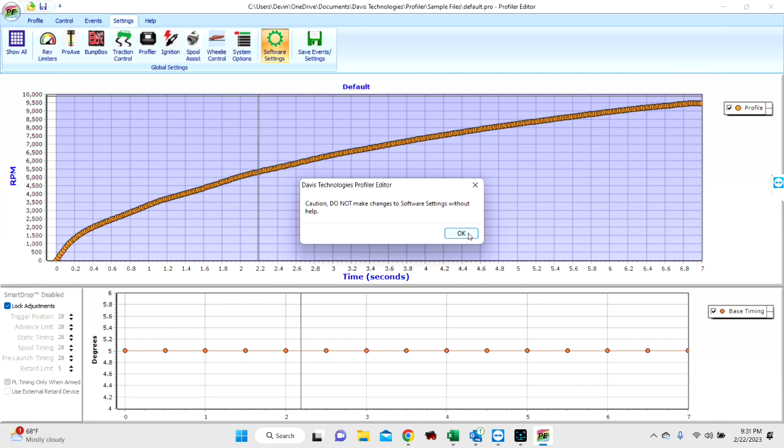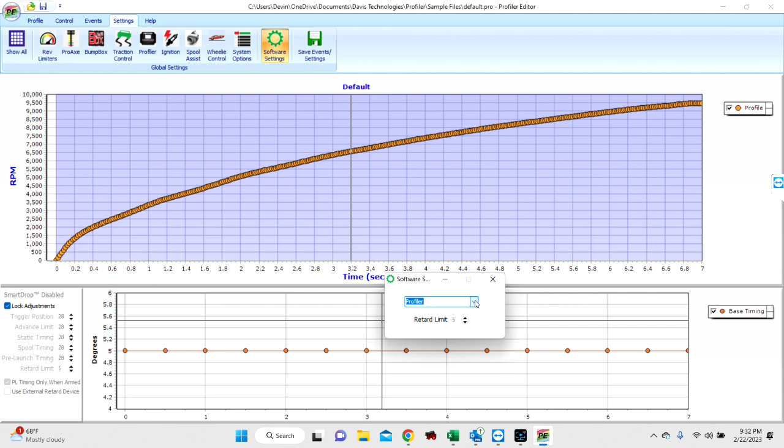You can do a Profiler, which gives you full use of all this stuff over here. But there's the pre-canned setup, so to speak, for Holley and Fuel Tech and our analog digital controller, the DIC. You can come in here and drop down, you've got a PFEFI or TC3 on Holley. That locks it in. Holley is pre-scaled at 0 to 25 degrees of retard. So that sets this, which is the most important part, so that when we do things over here in the timing, 3 degrees on Profiler is 3 degrees on Holley. For example, if you go to...

So is this something that everybody should hook up with a TC3? It's good to do it. The TC3 should come out of the box with a basic setup in it when it's licensed for Holley or licensed for Fuel Tech, but I can't say that works 100%. So just do it, right? Just everybody do it. Yes, and even though your TC3 series doesn't have a profile, like uncheck that, you can still use it to download the data and to do your basic system options and that stuff.

Back to the timing configuration, Holley is preset for 0 to minus 25 degrees. Fuel Tech is 0 to 35 degrees. So if you had it set here, but it's going to a Holley, 3 degrees ain't going to be 3 degrees. It's going to be offset that percentage, right? So you want to make sure this is right. And it's just a little easier to understand as a whole retard platform. Whereas when we do a Profiler, it's in timing degrees. Actual, what I call timing light degrees, which you see on the balancer.

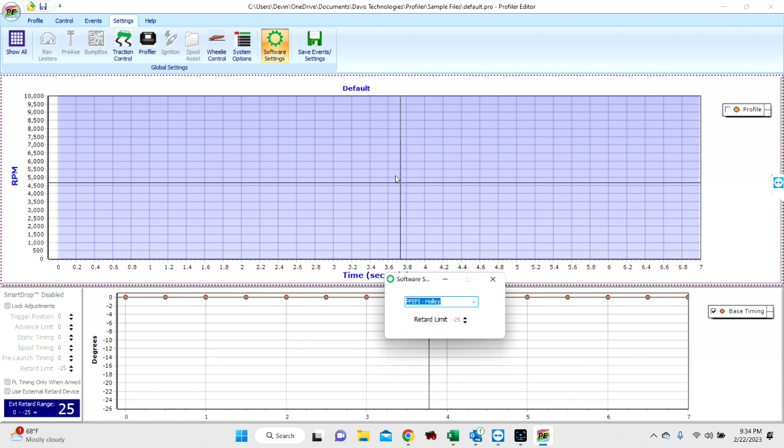They're used to it anyway. So we're telling the Holley, hey, we're in traction trouble, take out 10 degrees. So whatever the Holley's already doing, we're going to take out 10 more degrees unless there's some limit that it runs into, right? So you click this, it automatically sets this, and it turns off features that a Profiler EFI module doesn't have, which is the most likely thing, a PFEFI on a Holley. You can put a Profiler on a Holley and have all your events back, but it's not the most common setup. So those guys are going to call me anyway.

Okay, so we've got our PFEFI. We've got it set up for Holley. Our timing is locked in. We can't change any of this. Our external retarder, which is the Holley ECU, is set for 0 to minus 25. So then we get into the system options, basically how the car's wired, what equipment's on the car.

Okay. So are you going to hook up an arming switch? Hopefully so. You don't have to. You can set the unit for always armed, but you stand a very good chance of losing data because you press the trans brake button to turn the car around, get back under the tent, taking the steering wheel off at the end of the run. The way Profiler works, when it sees a trans brake release, it overwrites the last data. So if you happen to hit the button with the car powered up as you're pounding on the steering wheel with your new world record pass, you just lost the data. So I like an arming switch.

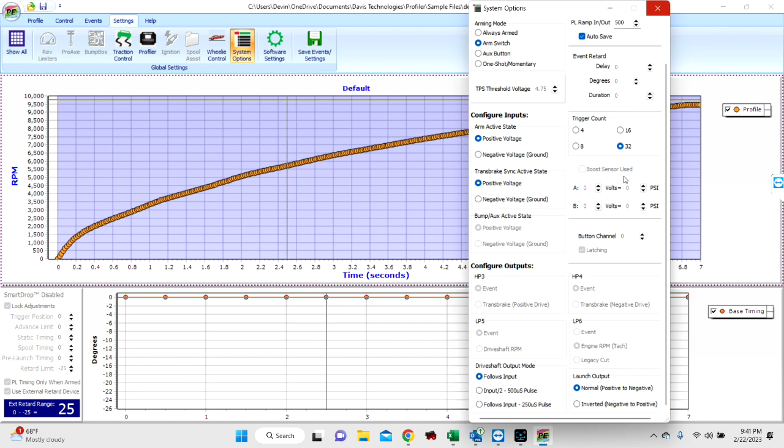All right. So you've preached this to me, and I preach this to everybody when I do videos. We just made a whole bunch of changes, so what should we do right now? I was just going to say it before you so rudely interrupted. Save and save often. You have a quick save up here. Right now, we are under the sample default thing. I don't think it will let me save it. See, it wants me to give it a real name.

So what I like to do, this is my habit. Let's pretend you're one person, one car, new folder. We'll get Devin straightened out here. 2023, okay? And then I like to go into that folder and create a track. In this case, the track's going to be shop.

It could be Sick Week, whatever, which, by the way, I think Devin just won, dominated, with a brand new car that his wife, I think girlfriend, built most of. So kudos to her. The wiring seemed to hold up for the whole run, and it was a good deal.

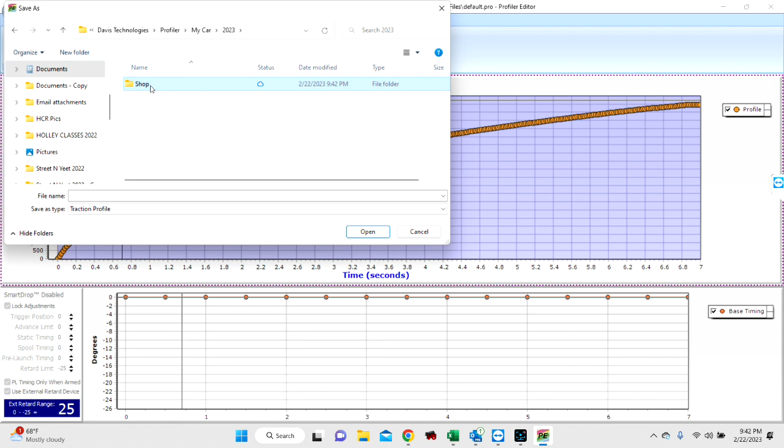All right. So we've got shop, and under that shop, we're going to save a run called shop T1. Now here, you can name these as long as you want, whatever makes sense to you. Hey, Sick Week with new converter, blah, blah, blah. You can make these as long as Windows will let you. Save that. This blue default, that's what's called the chart title.

I use it as a memory jogger. So I click that, it brings up the dialog. You want to keep these short, definitely under 32 characters, but the shorter the better, because when you upload, this name gets uploaded. By the way, you don't have to put the T1. We'll cover that in a second. You hit OK. When you upload, this name will be uploaded to the profiler. If you have a profiler with the built-in screen, the bottom left corner will say Shop T1.

So you can get a memory jogger that you did, in fact, remember to upload it. After you got the tune-up done, before you changed the converter and adjusted the valves, and the generator stopped, and you ran out of gas, and the tent blew away, you can go back and quickly look and see, yes, I uploaded it, or my able-bodied companion, Laura, uploaded it, or whatever. The right tune-up is in the car, okay?

If you have a PFEFI, and I have to get used to this, you may not have a remote screen hooked up, and you don't get this little memory jogger. But the other part is when you download, the download is going to be called Shop T1. Then it'll have another designator that you'll see if we can upload, but I don't know if Devin has a box handy.

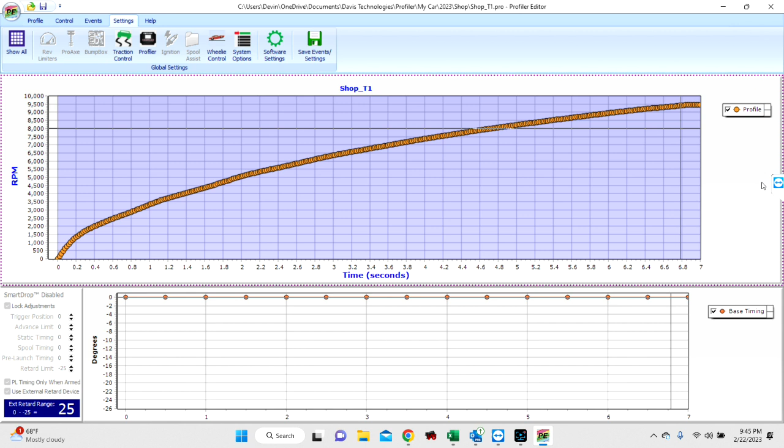If you're familiar with Racepak, it's sort of the same deal where you pick the little buttons for which run it was. Then the software tries to keep up with that for you. So when it sees you download, it knows the next upload is going to be T2. The next upload is going to be T3. It doesn't know when qualifying starts, so you got to click qualifying and 1 again, and then it tries to keep track of it. So that way, when you come over here, you've got a pretty organized set of things with timestamps, which I despise when people rename their file and delete the timestamp.

I think it's still in the properties if you right-click it. Profile itself may not have it, but it'll be like here, right, of when the run was made. And a seldom used thing, even by me because I forget it's even there: you can put notes in here like your time slip or converter notes or different shit. Okay, getting off tangent here. So you've got that, save and save often.

All right. If you've got, we already did that when we set it for Profiler, Holley. That's it. And then there's system options. So what you're saying is what we just went through is all you really need to do to get this thing up and running and setting it up. It's pretty straightforward.

This video that you're doing now, I've needed to do for years. I apologize for that. I just, my own worst enemy. I've had this exact conversation hundreds and hundreds of times when I could have just recorded it once and referred it to people. There's just always something else to do in a small operation. So, and here it is late at night, and we're doing it on a Wednesday night. And I'm loading up to leave for South Georgia at 5 a.m. But Devin offered to do it, and I said, this is a good idea. All right. Little sidetrack, Devin.

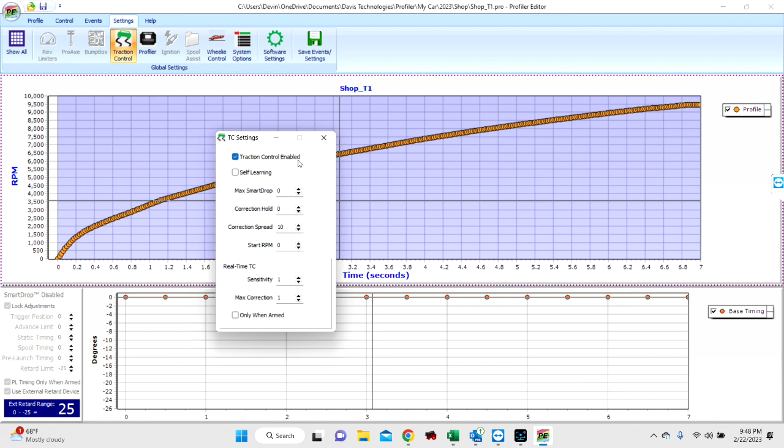If you've got a TC3 series or you've got a Profiler with self-learn, jump over here. Okay. Very confusing subject. I'll try to keep it short and simple. If you have a Profiler with self-learn or you have a TC3 SL, with Profiler, you have 3 traction control systems running simultaneously. You have the profile, you have the non-self-learning traction control, which is working on just a rate of change. And then if you have a TC3 SL or a profiler with self-learn, you've got self-learning also working.

The difference in these two, this method has nothing to do with a profile, okay? It's only looking at your drive shaft trace for a rate of change that's faster than your car can go.

So to put it real simple and basic, let's pretend you've got a 7-second car that goes from 0 to 7 seconds, from the starting line at 0 driveshaft speed and 7,000 RPM at the finish line at 7 seconds. Easy math, even I can do it. It was gaining 1,000 RPM a second, linear. Perfect race car, right? So you would set your TC3 that anything over a rate of 1,000 RPM a second is a problem. My car can't accelerate that fast.

This 3,000 pounds with this 700 horsepower cannot gain more than 1,000 RPM a second. Physics just don't allow it. If it does, it's most likely spinning, since gravity probably didn't change. We didn't get that good of a tailwind, and we probably didn't go down a big hill. So the most likely reason for my car to be going 1,200 RPM a second instead of 1,000, like I told it, is it's spinning the tire.

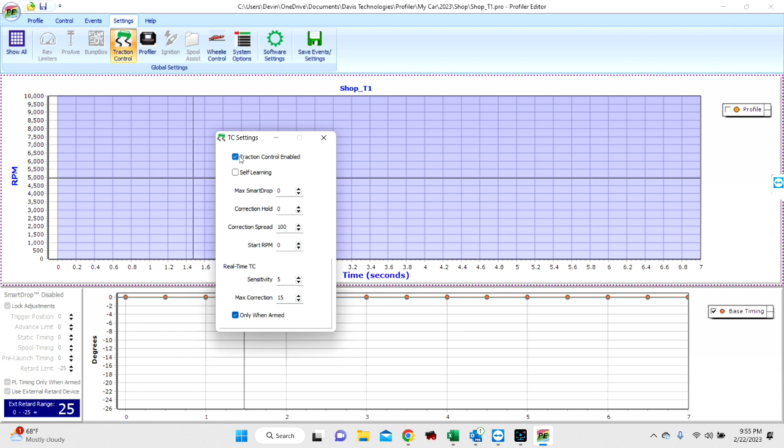He gets to the strip because all he's got is a TC3 SL. He turns self-learning back on. He doesn't have a profiler. And it's running on these settings here and this setting. If you get above the 100 RPM and you have smart drop enabled, let's say you got level 3, at 101 RPM, it will start dropping 1 out of 8 holes. At 50% of this 100 RPM spread, so at 151, it will increment to the next allowable level, 2 out of 8. At 201, it'll go to 3 out of 8. At 500, it's still going to be 3 out of 8. That's as high as it's allowed to go. I don't want to get too far down this rabbit hole because this is self-learn, but there's some quick information that might give some guys some ideas.

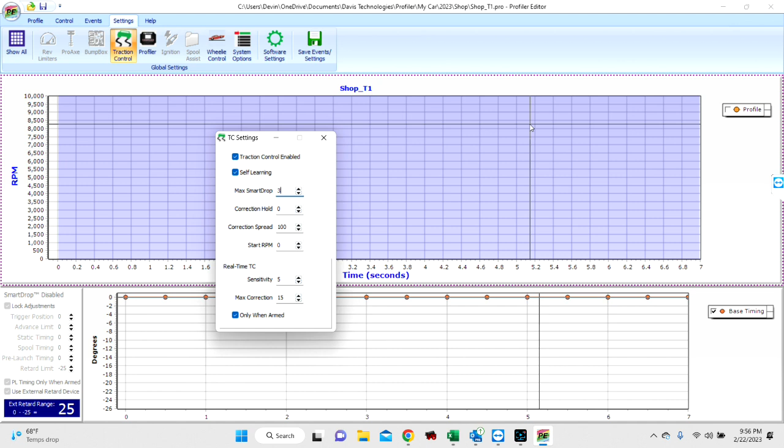Now, if you have a profiler with self-learn, I want to touch on this and we'll have to circle back, maybe another video. If you have a TC3 SL Pro, which is professional, not profiler, by the way, it then uses zones. On this screen right now, we have one blue zone, and we have zone settings in which you set a TC sensitivity and a retard per zone. Now we have more zones, right? We'll get back to that. So as soon as you let go of the trans brake, this gets overridden by this column or row here, okay? If you have a TC3 SL, it works on this screen, which is also on your handheld or in your handheld emulator through your PC. So wanted to touch on that because it's a loaded subject. All right.

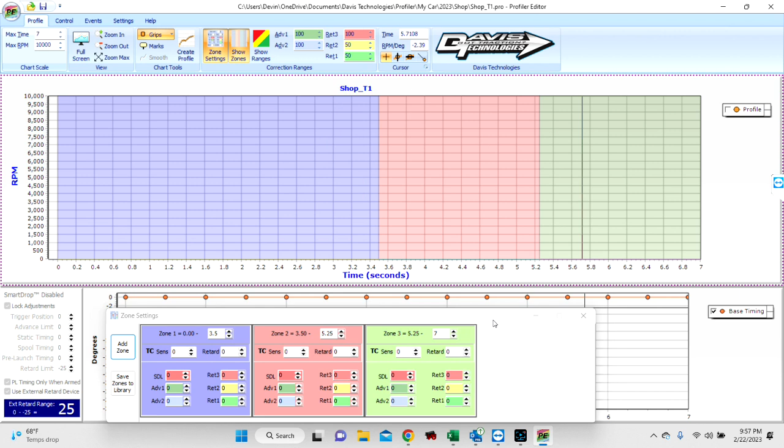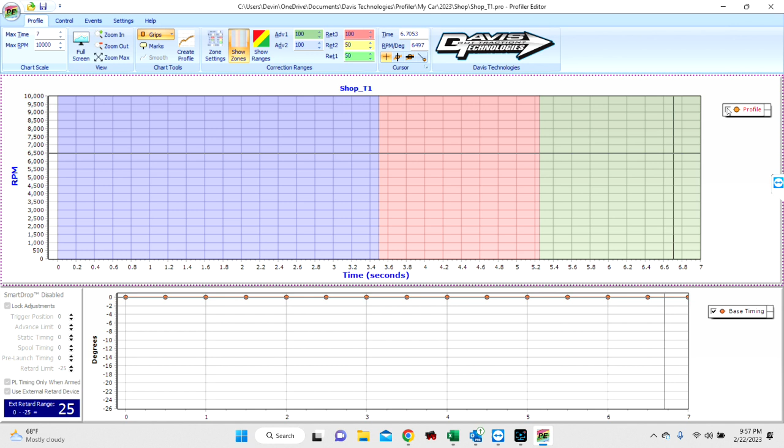So we've got traction control already working, ready to rock and roll. Let's set this up as if we have 0 runs prior to this, right? So this is a new car. Let's just say it's a brand new car. They've never been out before. What do we do? How do we set this thing up? We don't want to build a profile? Okay. We don't have run data already. We don't have a drive shaft curve already. Let's just work off of a baseline to get somebody to go out there and make a pass with their car, gather the data, and move on. Right. And we have no previous profiler data to go on. Okay. Couple things you can do.

If you got Racepak data, you got grid data, they're very easy to import. That's another video. Devin made a video on importing your Holley data. It's not as easy, and I did it once, and then I tried another file and I failed at it. It's temperamental. So in that case, I tell guys, look, don't get too hung up on that. What I do is I help them come in here and eliminate a bunch of these dots. Again, we can probably follow Devin with a little tips and tricks sort of video, and then just go to one of your previous Holley runs, and for the first 2 seconds, manually enter the data right here. Type it in. So let's just say that they don't have anything, right? Like, what do we do? We just turn on self-learn, let it rip, and see what it does. Right.

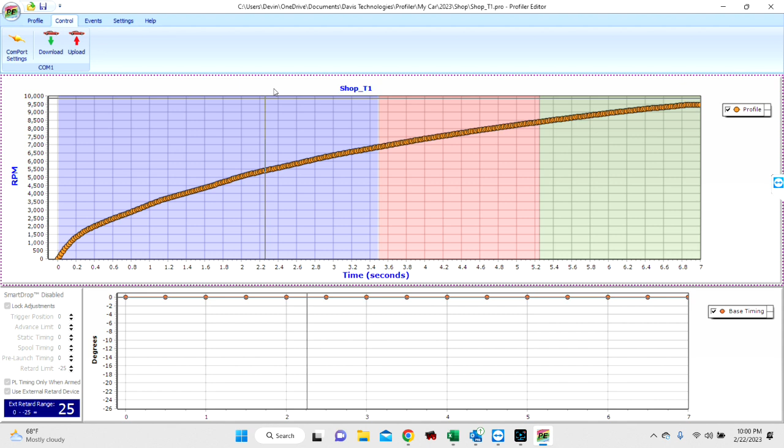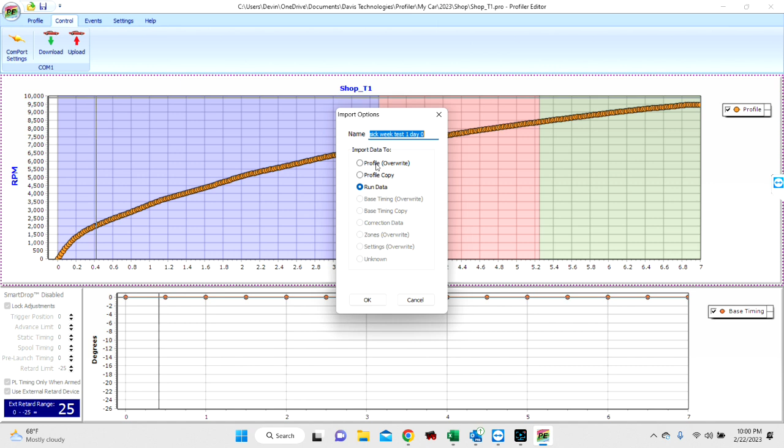All right. So you made a pass, you come in, you download it, and you'll come back with something like this. We're going to bring this. This is an import of old data as run data. So now we have a pretty line on the screen. By the way, this is what your drive shaft RPM should look like. It doesn't look like you put 97 points of smoothing on it. This is data sampled 1,000 times a second, plotted at 400 samples a second.

Okay. If we look at this, it's every 2.5 milliseconds. It's 400 samples a second. This is what Devin's car did. Leaving the line, I can absolutely guarantee you from right about here, this is real data. Here, yes, it's a little erroneous because you're just getting triggers going. It depends on where the sensor's parked, where the trigger ended up. Was it right at the edge of the sensor? Was it dead in the middle of the tooth? How quick did he get those first couple? What did the car do? A couple things. But once you see it start doing this, this is real data.

So this car kind of left and went, rrr, rrr, rrr. I doubt if you watched video footage at a quarter second, the front tire is probably just back in here. The front tire hadn't moved yet. The fender's probably separating, but that's about it. All right. So he's got this data. This is what it looks like. Yes, it did this. That's a tiny bit of tire slip right there. Here it's working that tire a bit. It's not getting in trouble, but it ain't dead hooked either. There's a gear change.

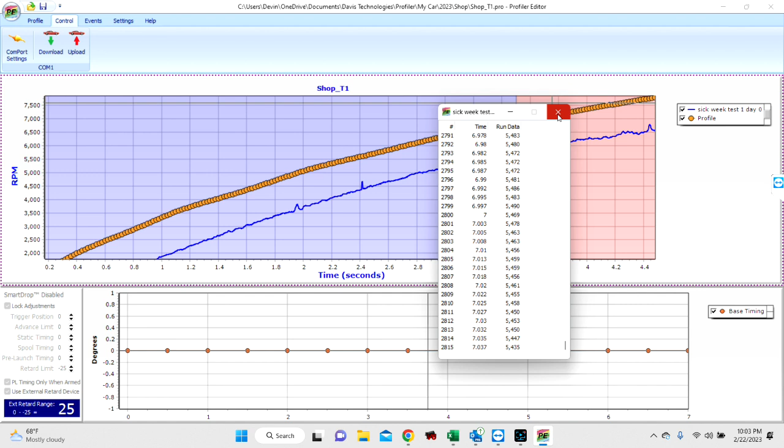Could be. Because you see, there's only one in this whole run. I haven't done the math on how many samples it is. It's 400 a second for 7 seconds. So that's 2,800. Is that right? 2,800 samples. We got a bad one.

Out here, I don't know if this is bumps in the track, or you're letting out of it and kind of bumping the throttle, soft run and kind of goosed it a couple times. Yeah, that's probably shut down and like letting out of the throttle. I believe that run went like a 468 or something like that. So it's probably just lifting off the throttle and bumps in the racetrack.

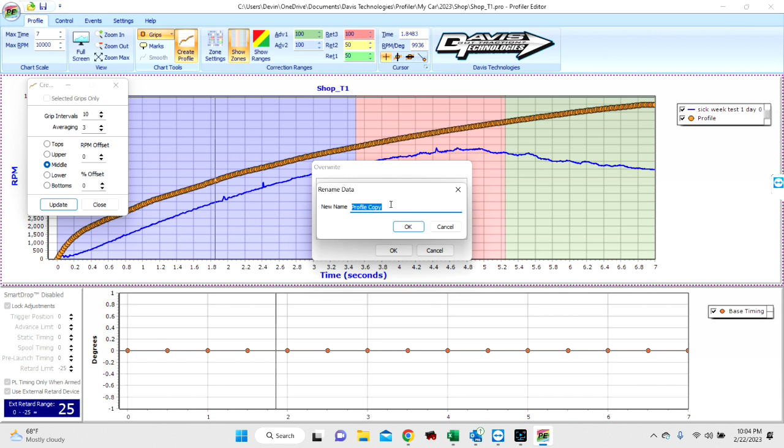Right. So to get to the meat of this video, we have our thing. We've got some data. We're going to save and save often. And we're getting ready to make our first run. The easy way to do it is go to create profile. Do you want a copy of this profile? That's just the default one. You can hit copy and you can name it profile copy or Devin's first attempt, or that's just going to be a copy of this old one. Okay, we don't need it. Click through that window. Grip interval.

I've got 400 samples a second. I've got data at an interval. I want to put a grip on every 10th data point. Okay, it's going to look like that. That's frankly enough. Okay, it's 40 dots a second. There's an averaging applied, and just the fact of having less dots kind of averages and smooths things out. But as I change this grip interval, if one of these two dots, due to the interval, happens to land up here, it's going to go up there with a little bit of averaging smoothing applied, right?

So I can do this, and you can see kind of how it behaves, right? I've only got a few dots, then it's just a pretty smooth, generic line. If I crank that down, less interval, less gaps between grips, you see it gets real dense. That's 200 dots a second, okay? This gets hard on your computer depending on how much computer you got. Because every time I try to move one of these, it's applying math to all of it to smooth and average and do shit. So we're going to run this back up here, back to 20, run that back down to 10. So that's your grip interval. 10's a real good place to be.

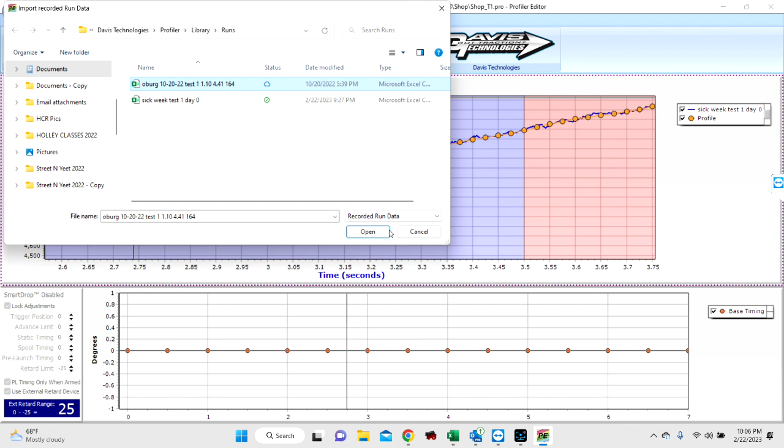Okay. If we had multiple runs, we can bring them in here and average them together. I don't want to get too far down that road because that's a separate video. But let's import one of your other ones. Bring in his run data. Yeah, that might be the same. That's around same. I believe it's the same piece of data. Yeah, it's the same run. I just renamed it. But to show the accuracy of our recordings and plotting, there's 2 runs there.

So, all right. Anyway, we can take those 2 runs and average them together. So we create profile, and we've got 2 runs selected on the screen, and we can average them to the upper part of that average, the very tops, the lower, the middle. Something that's actually pretty handy. Let's just go back to our 1 run, okay?

But yeah, so I want to make it. So show them what you... This was a base run. We want to go a little faster. I can go here. So show them what you did there. Oh, I made it smaller. Yeah. So you can drop this arrow down and change your size. I can make them where they're easy to get a hold of and drag around, and do things with manually. Or I can make them smaller, a little more detail, or I can just click the button and turn them off, and I still got the line.

So now I want to take this, and for exaggeration measures, I'm going to make the whole thing 200 RPM faster. 200 RPM is a real big deal down here, not so much out here. So a better way to do it is, hey, that was a real soft tune. We want to step it up a little bit. We're going to go 50 RPM on the whole pass. You can't even see it until you zoom in. Okay, it's 50 RPM above. Now, those of you that are used to your grids or maybe other systems out there, this is what you're used to, is running this thing 50, 100 RPM above so it didn't false trigger.

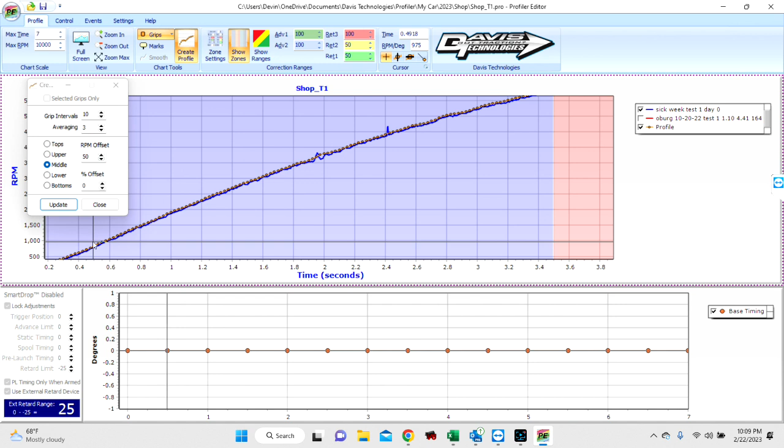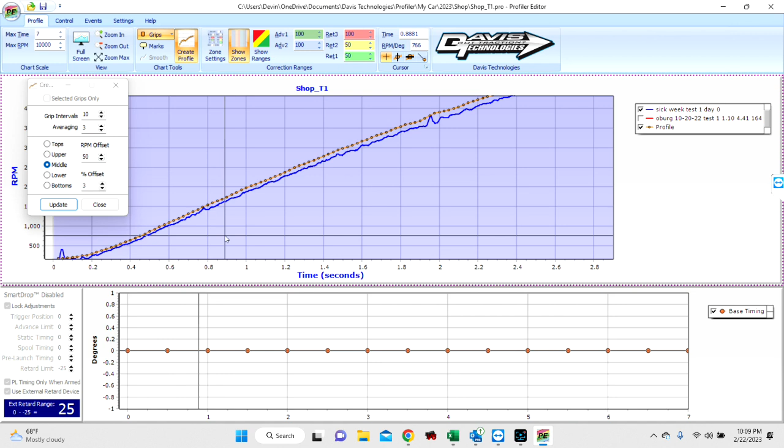And then what I think is a really cool feature: I want to go 3% faster. That applies 3% to all of it, which is very little down here. Now we're 51 RPM, but you can see it exponentially allows more and more and more speed, which is also what your car is going to do. If it's 60, it's better.

Yeah, so if you were following along during Sick Week, we were going exponentially faster, or we were picking up every day. So I think we went like a 68, a 63, a 60 flat, and then a 59. And this is one of the things that I used to offset, to allow that.

It's also a handy tool when you break your 410 gear and all you can borrow is a 488 and you're rethinking the world. You can use this to at least get a theoretical profile. Understood, the car is going to accelerate and behave differently, but maybe it's just a smaller change than that. And it's like, shit, we know that we got a taller gear. Maybe you call that a taller gear. It's going to turn more RPM and go the same mile an hour. We're going to run over our old profile. It's going to slow us down.

Well, instead of just guessing and dragging it, now I've got videos on the More Traction support site to get into using the software more. I don't want to waste Devin's time on how to edit profiles and all the things we can do. This is more of a first setup theory. So there's some stuff there.

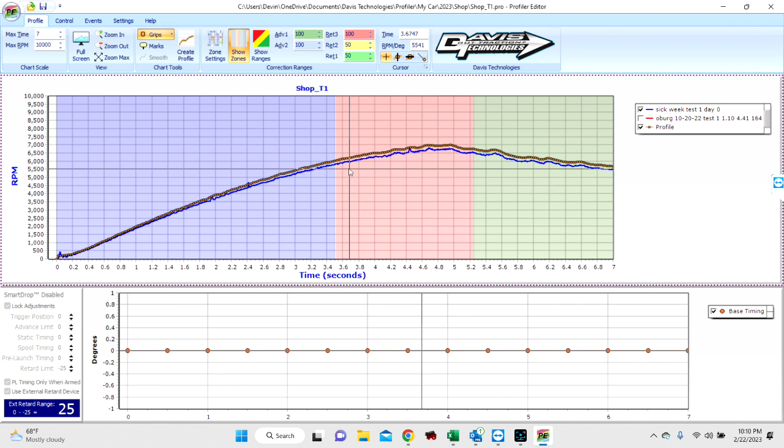So now we've got a plot. Okay, so what are we going to do about it? What's our tolerances? Now I'm going to go back here and start from scratch. We've opened the software up, we've got one zone, 0 to 7 seconds, and maybe we're going to turn those off for now. So we've got our profile.

Okay, here's our target drive shaft, here's our actual drive shaft. If it goes above this target, we want it to do what? Or how aggressively. That's your ranges. This is your rainbow. Okay. We have our target drive shaft with the dots. We can make those bigger to see them. If we start getting up in the green, we're going to start pulling timing out linearly. I pronounced it correctly, I think.

From 1 RPM over, it's going to start pulling timing up to the top of the green based on a 50 RPM spread, tolerance level, margin is a good word. I can make these as wide. Okay, Frankie Taylor Pro Mod, 100, 100, 100. Okay, normal runs move 100 RPM, no big deal.

Brad Edwards, Pete Harding, radial. And Pete's got some videos out where he's shared some of his tuning tips. But I certainly work with radial guys where something like this is the norm. If it goes above 1 RPM, I want to start pulling timing. By 10 RPM, I got a couple degrees out. You cannot let that radial get a run.

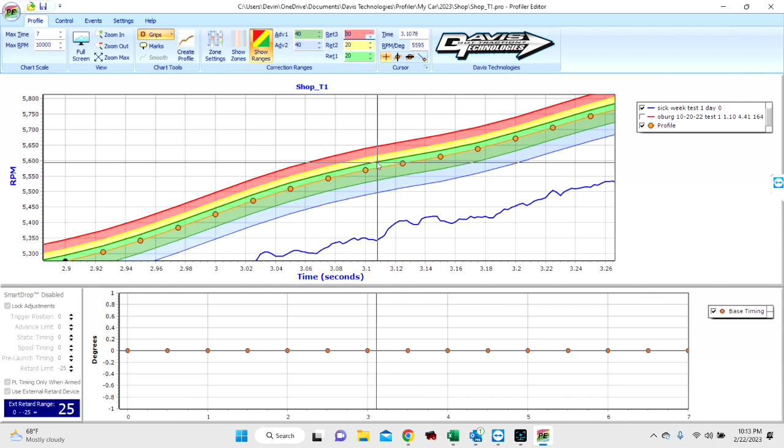And then we've got, what are we going to do about it? That's our zones. We come to a zone. Okay. In the first one, in the green, we're going to take out X many degrees. In the yellow, we're going to take out more. In the red, we're going to take out more. Important note, these do not add together. That'll make a little more sense in a moment.

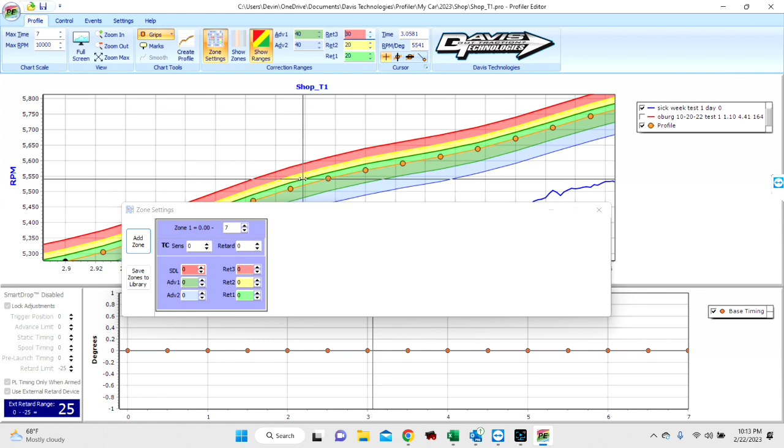Smart drop limit. Traction control or self-learning traction control, right? Rate of change traction control or self-learning rate of change. The reason I'm not filling this in right now is because I want to show the zones. I want to show full screen.

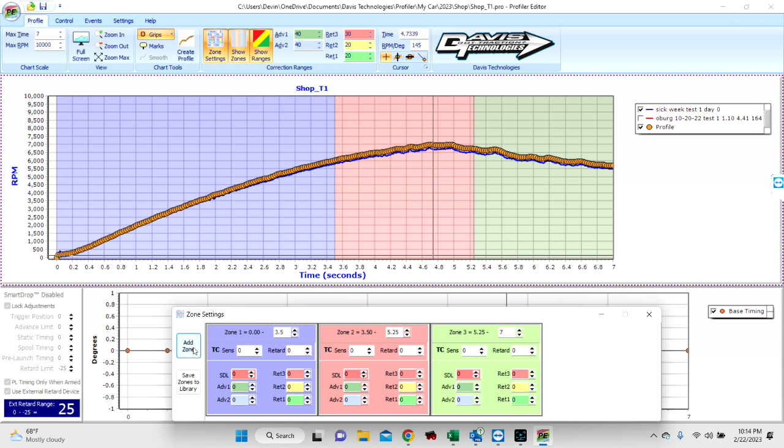We're going to add some zones. We're not going to run one setup the length of the track. I'm going to do a dead zone at the very beginning. So we're going to add a zone. This first one, I'm going to run like 0.1. It's going to stay all zeroed out.

To look at Devin's specific data, turn that off. We'll zoom in here. I'm using the scroll wheel to do that. We'll turn the ranges off. His data kind of calms down and starts being real data out of here somewhere. Okay. So let's take this guy. We're not going to touch it till it goes that far.

If you can't get a 1/10 of a second on your own, you might look into another hobby, right? So it's up to you to get the first 1/10 of a second. I really just don't want to add timing because it thinks it's slow or it thinks it's fast. You could also move the profile through that area. You could manually just drag all these up here, and kind of default it that way.

Now, if you have add, it's going to try to add because it's below the line. So it would be doing whatever's in these cells. But a couple ways to skin that cat, right? Easiest way, dead zone. Okay. Now, if you look at this real closely, there's 2 zones here hiding. Drag this bigger.

Okay. So then let's take us a zone out here, 60 foot. Is that? Yeah, I don't know what you 60 foot. No, we went 130 because we were on like a tiny little tire. So let's do 130. All right.

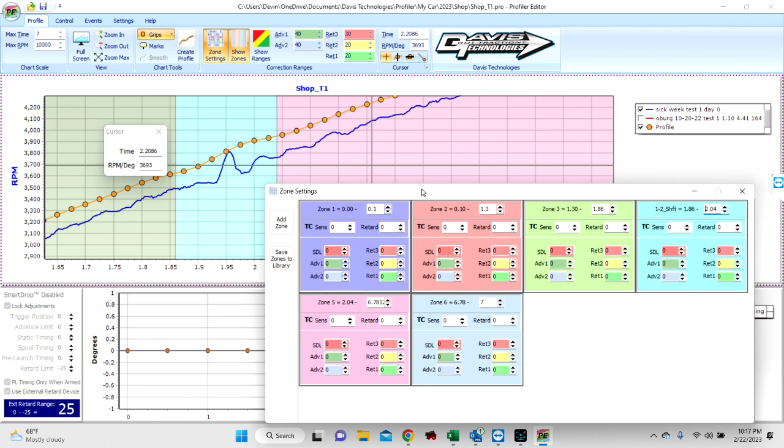So if we were adding timing back here, we may not want to do it in the shift. Maybe you do. Maybe that's the speed secret of the new millennium, and you're going to put 10 degrees in right before the shift, and it's going to go like hell. I don't think it's going to. It's a bold strategy. See how it works out for you.

So, all right. So we've got our shift zone, and then if Devin had real data, let's say shifted somewhere out here. I'm guessing it'd be out here somewhere. Let's call it 3 seconds. We're going to run this out to 3.0. And then we're going to add one more zone, which will make sense in a moment. 3.25. I put a comma instead of a point. So it's mad at me.

By the way, my overseas customers like Sweden, they got to put their keyboard in English, or they use commas for decimals, and it really breaks Profiler. Not happy.

So I'm going to add one more zone yet. Devin, you hope to have like a 6-second car, right? Yeah. I think it went 4.60s or something there. Okay, so now we have, let's call it 5.50 here. Okay. No, I'm sorry, I did that wrong.

This is another shift zone. This is why I like changing the color. I just had to figure out where it was at. Do that. Rename it. 2-3 _ shift. You might be able to use a space there, I don't remember. Okay. Then we got the end of our pass, hopefully is over by 5 seconds.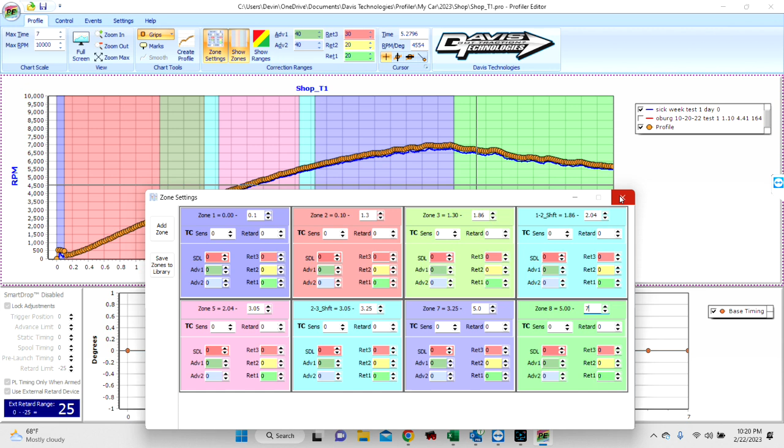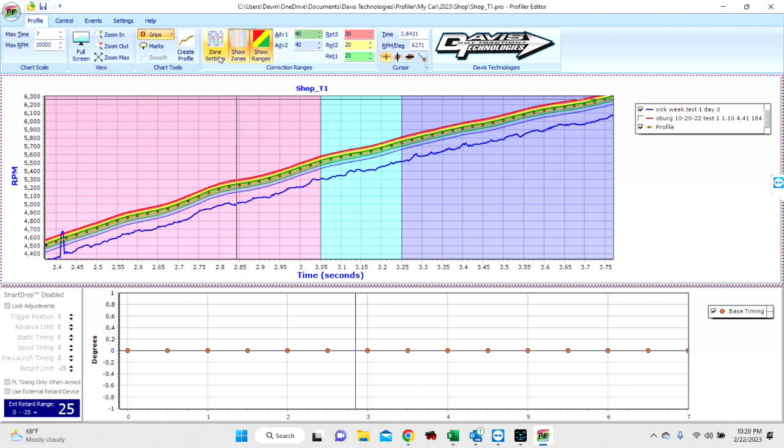But anyway, now you notice we have 2 zones here that are nearly the same color. Right click, zone color. We'll make it green. And other people may like this. You can darken these up to whatever floats your boat. Okay. So there we've got our target drive shaft. We've got our tolerance levels, 20, 20, and 30, 40 and 40. 3 retards, 2 advances of what we're going to do if it deviates from this target drive shaft. And then we've got our zones, which is what we're going to do in each zone to correct the problem.

Don't let it overwhelm you. If you know how to work one zone, you know how to work 8 zones, right? So we're coming here. First pass, we're going to play around with, hey, let's just add 1/4 and 1/2. Let's retard 1, 2, and up to 3. Okay. So is everybody noticing what's happening there? As you modify retard zone 1, it also modifies retard zone 2 and 3 because it won't allow you to retard, say, 2 degrees in range 1, but then only 1 in range 2, right? It has to grow. It has to be a larger retard every single time that you step up.

So you basically can't screw it up. It just does it for you. Hopefully so you can't screw up. This is not 6 degrees total.

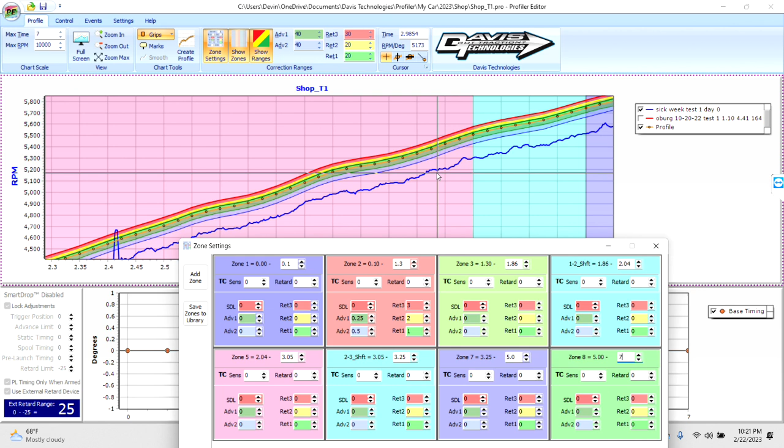As it travels through the rainbow, as you're riding the rainbow, by the way, we may get some riding the rainbow shirts for those of you that want to really support Profiler Nation. First time I tried it wasn't a big hit. None of the Pro Mod guys would wear them. So Frankie just refused to until he went 348. Then he said, I'll wear it. So

Anyway, as it deviates from this target and starts going above, it will retard up to 1 degree by the time it's 20 RPM too fast. So right here, it's at 1 degree retard. Now it's going to go from 1 up to 2, and then from 2 up to 3, which is actually at a slower rate of retard. Okay. The red also gets into our smart drop. Let me give this an easy number. Okay. To explain smart drop.

Smart drop limit. If I go smart drop limit 4, we can lose up to 4 out of 8 cylinders. As soon as your drive shaft touches the first quarter of the red, it will be retarding whatever the retard level is. And in the first 25%, as soon as it touches it, it will drop 1 out of 8 cylinders. When it gets to 26% of the red, it will be touching the second quarter. It'll be dropping 2 out of 8. 51%, you're actually into the third quarter, which runs 50 to 75, right? So it's dropping 3 out of 8. And then as soon as it touches the fourth quarter, it's dropping 4 out of 8. That's real cool when you do this.

Now we're only going to drop 2 out of 8 max. So the first quarter is retard only. Second quarter retard only. 51%, you're touching the third quarter. We start dropping 1 out of 8, then 2 out of 8. It goes up here to the moon. It's only dropping 2 out of 8. Okay.

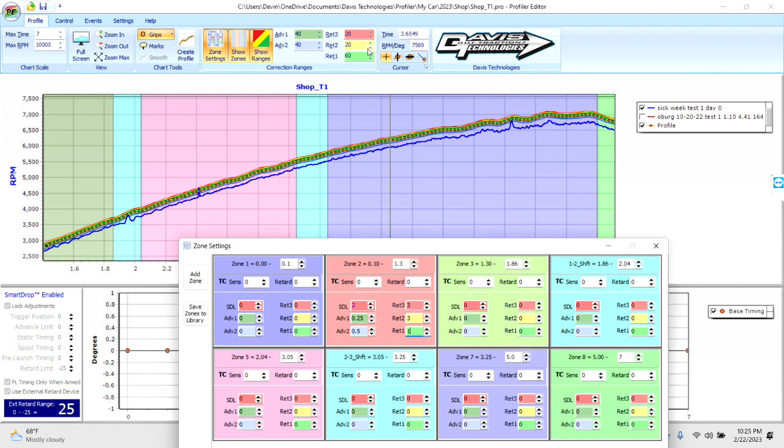The degree didn't do the job. Let's get it realistic. We took a degree and a half out. That didn't do it. It helped, but it didn't fix it because it got up to the yellow. Well, through the 20 RPM of yellow, we're going to go another degree and a half to 3 degrees, right? Or we're going to go up even exponential. We're going to take another 2.5 out. So now we got 4 degrees.

2 things are happening. You're taking timing out at a faster rate of retard per RPM, and your motor's less happy with 4 degrees out than it was with 2 degrees out. It's also kind of exponential. You get 12 degrees out, it's pretty sad. You get 15 out, it's real sad, right?

And then you can get real crazy. And if that don't do it, I'm going to take 10 degrees out over the next. Maybe you got a 40 or 50 there because you don't want the smart drop being too toggle switchy. So you want to be 20, 40, 60 in trouble before it ever starts dropping a hole, and that's early in the run, your 60 RPM.

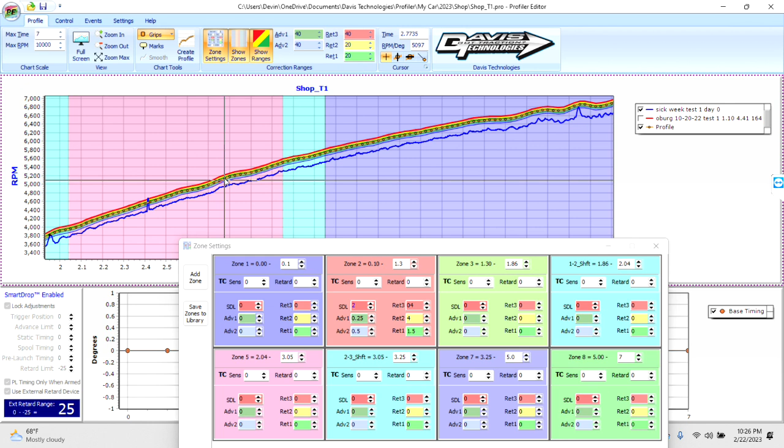We can't change the range width down through the run, but we can change the retard levels. So it's kind of this different way of getting the same thing. Maybe further out, maybe through this section, I'm really worried. This is when my power's really coming in. If it starts getting too spicy, I'm going to get after it. So you set up each zone to what makes sense.

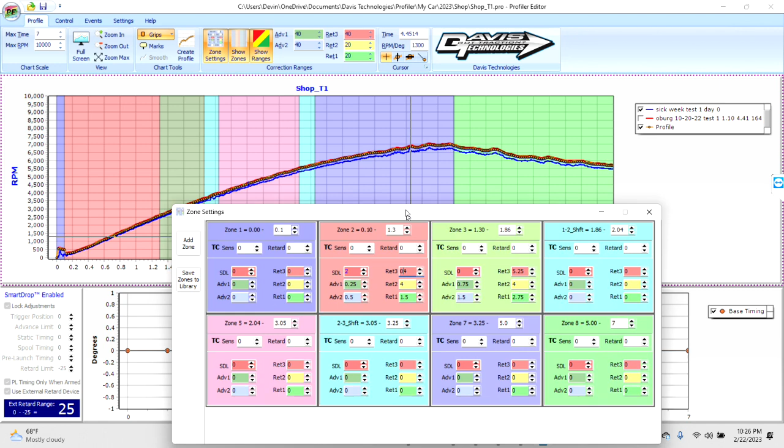How much you want to add, we cannot add above the Holley or whatever system's in front of it. We can't move the crank trigger. We can only add timing if we have timing out. So to sidebar a little bit, me and Devin and people helping you tune will try to talk you into moving your launch curve, your tire management timing, not your boost curve, not your nitrous timing, your launch curve.

And an easy way to do this, right click, show data. I'm going to jump big here, minus 10 degrees. Okay. We can close this now. It's off the screen, zoom max. Okay. So we're going to leave the line. We're going to jerk 10 degrees out. We're going to ramp that in.

We'll do this real quick and crude. We're all in by 2 seconds. Once we get to 2 seconds, I don't care what I type in these adds, it can't do it. It's already at 0. We can't go above this line. Okay. We can only put timing in where we have it out.

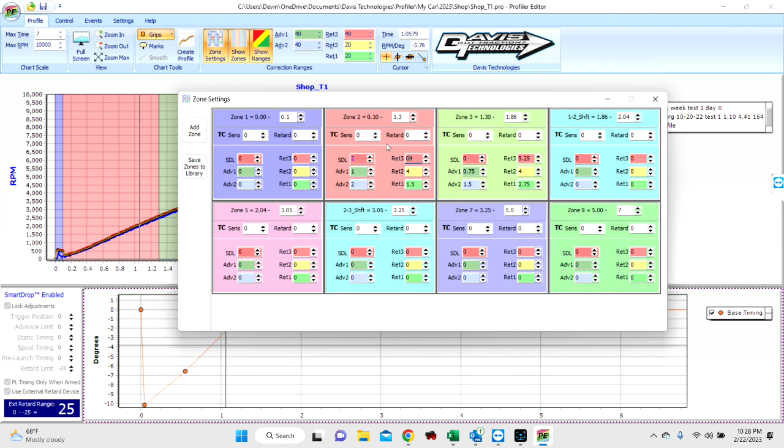So here we got there, track's way better than we thought this no prep backwards track was going to be. And it stuck the tire. It's way slow. And the whole pass is going to suck, except thank God it added 2 degrees and picked me back up. So your timing window just got, in say this case, you just gained a 7 degree kind of lazy man's timing margin.

Your job has now switched from how much timing is going to give me a wheel speed I think this track will hold, to I think this track will hold this much wheel speed. Here's the rough timing curve I think will do that. I know it's not going to leave at 0 retard. I gotta pull out 8 degrees to have a chance of this car leaving the line.

But if it starts getting wrong, I can take out 5 more within 60 RPM, 10 RPM if you want. And if it's slow, it can add some timing. It gives me up to 6 degrees, down to minus 12, 13 in this case. So you come back and you download that and you got to run.

And it did great. Devin, I'm gonna try something weird here real quick.

Hold with me just a second. I'll try to drag a picture. I thought it was on my desktop. I don't want to waste any time on this. Devin, you may have examples you can post up or stick in with something, comments.

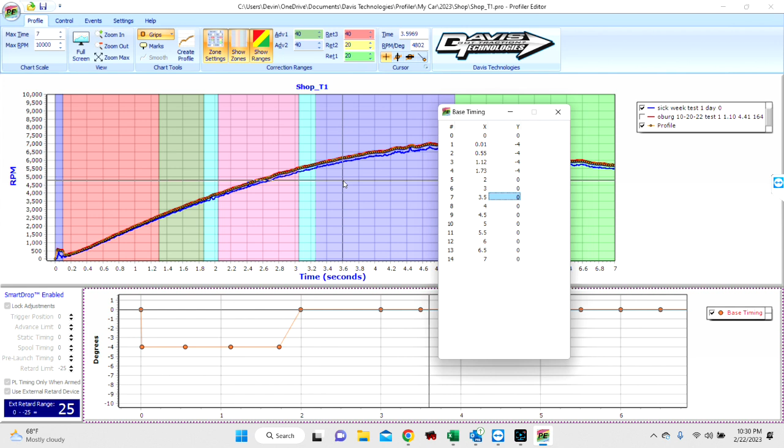So when you're riding the profile, that timing on the bottom is constantly busy, adding and removing timing. Yes. So this is a little thing that I do quite a bit. So just like Shannon was saying, you can't add timing beyond what was already there, right? So it has to be removed. So we may run, let's just say right here, like a 4 degree retard, like run curve retard the whole way, so that we have the ability to add those 4 degrees back in.

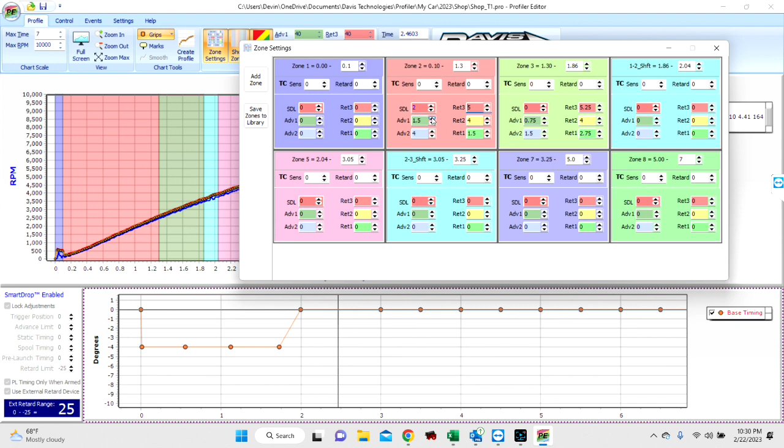So we have 4 degrees out along this run, and then we'll come into our zone that we're working, and then we'll put those 4 degrees back in, right? So we're automatically trying to slow it down no matter what, but we're giving the profiler the ability to add the timing back in. I do this with turbo cars most of the time, but most of the time the turbo cars we're working with boost control ramps, right? So it's how we're bringing boost in.

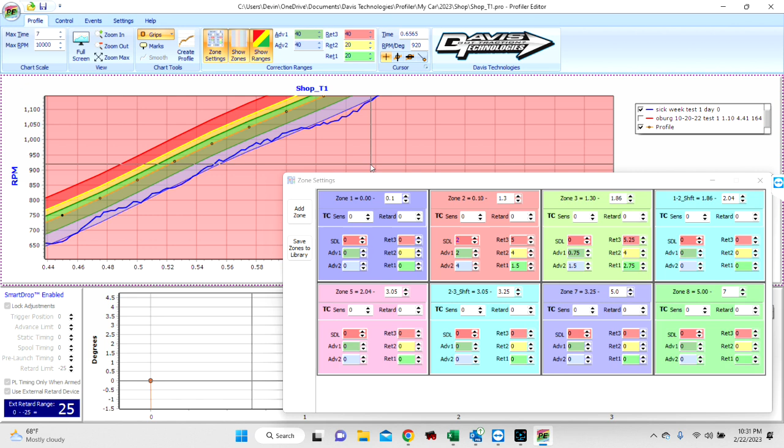So if we knock 4 degrees out of it, but we allow the profiler to add the 4 degrees back into it, it's literally just going to be a zero retard, as long as everything goes well, right? But if we're ahead of the curve and we've already got 4 degrees out of it, we should be in a little bit better shape. So hopefully that makes sense to y'all. That's the way I would run the advance for a turbo combo. Yes.

So yeah, there's a lot. You can do that and just open up your tuning window. What I was getting at, I'm not finding the picture I wanted, but y'all may have seen it. I've posted it a couple times. I've got more examples here. Devin's freaking me out. I'm under pressure. I can't find it right now.

When you're riding these dots, this timing down here is just busy. It's just constantly add and remove, add and remove. If you want to go faster, move that profile up a little bit. It's automatically going to add timing and go faster if the track will take it. And you've got this nice high resolution data that's showing you all this stuff. So this is kind of your first step. Now you've got to run. Usually 2 or 3 passes, you're starting to really get the hang of this, and it's pretty good.

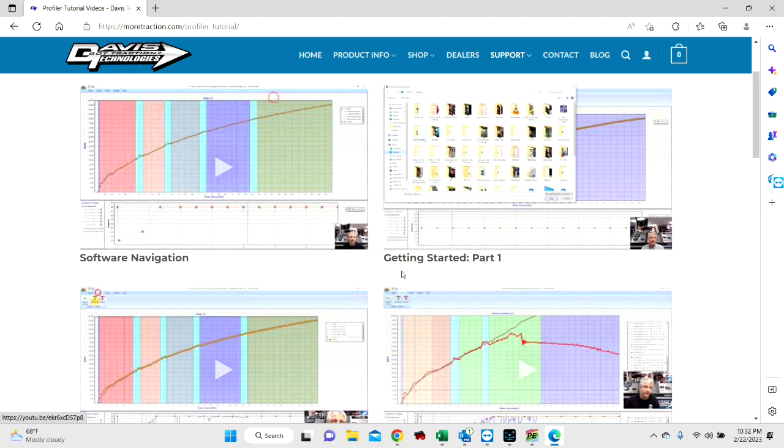Devin, if you click the Davis logo in the software, it'll take you to the website. You go to support, which I'm failing at. Good Lord, hover, son, hover. Profiler software tutorial. There's 4 videos here of me babbling at the screen, but you'll learn something.

Like right here, here's almost what I was trying to show you. It's in trouble. It's pulling timing, adding timing. That's that gear change right there. That's a self-learning correction, jerking that down. Now it's adding timing. This is what a profiler run looks like. This was a no prep. This is actually Caitlin Morton. This is where it's jumping out of gear because she's holding the shifter in gear.

She was the first person with balls big enough to try self-learning the night we got it working. She was racing Megalodon and said, I'm going to get beat anyway, so what have I got to lose? And she won. This was the previous pass, blah, blah, blah, anyway.

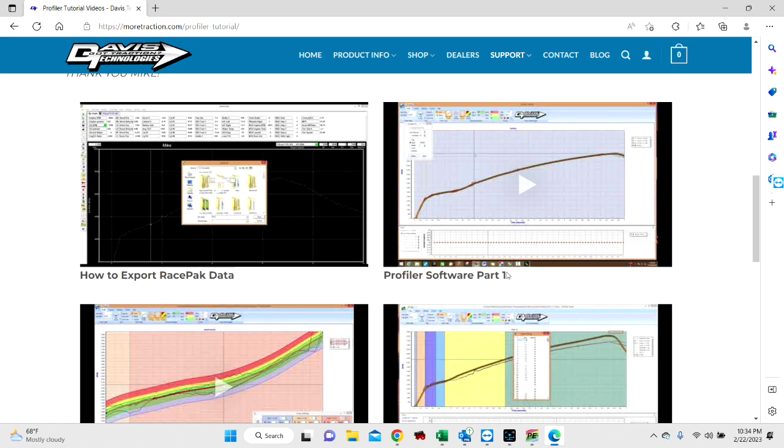But there's these videos. Here's another example you'll see. These are gear changes. But you can see it's just constantly working that timing. That's what profiler looks like, okay? These videos are getting a little bit of age on them, but Mike Lucas, one of my first customers out of Nitrous Pro Mod, had one of the first profilers out there before there were any instructions. Luckily, he wrote technical documents for Xerox Corporation. So he said, hey, I'll write the manual. So he wrote a 176-page manual and did these videos. They're still pertinent and they're good and they're much slower than me, which is good.

If you're not using a big profiler with events, you don't need this. If you got a smart relay, this is a good video. But if y'all watch these videos, it saves me and Devin on the phone with you explaining how to move a dot. No offense, but come on, guys, put some effort into your race cars. You just spent a lot of money.

The other thing is, you kind of got to be reasonable with your tune-ups too. You can't put a tune-up in there that's supposed to go 4.0s on a racetrack that's not going to hold anything faster than like a 480 or something. So you have to be reasonable. That's why these videos are hopefully helpful to you, but you got to be reasonable. You can't just swing for the fence every single time and then rely on this.

Right, it had no chance of working. And hopefully if it did spin, we're pulling out 9 degrees the whole fucking time, like you told it. And it just didn't work.

So another sidebar, this was done pre-PRI for a different reason, but y'all may find them very interesting. They're on the blog, not on tech support. It's an overview of our stuff versus some of what's out there, a comparison in real time. Holley, Fuel Tech, Grid, Davis, all running on the same runs at the same time. This gets into the TC3 and the self-learning stuff. Overview, more about Profiler, TC3, and then all the systems running together.

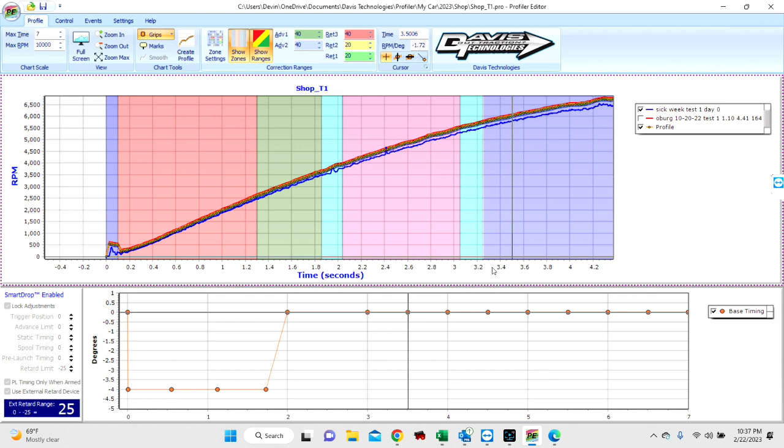That's why your big Profiler or your EFI with a screen on it, the screen blacks out when you hit the trans brake. That's on purpose. You can't communicate with it if it thinks it's on the trans brake. Its only job in life at that moment is 1,000 times a second looking for that trans brake release and starting this sync within a thousandth of a second, so that all this matters. That's how we can run 5 RPM margins and not make false corrections, if the car does the same thing.

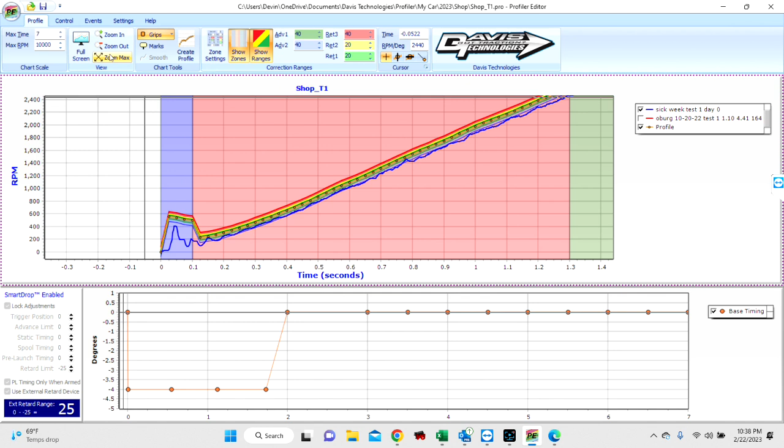So, there is a difference. It's not just me beating on my chest about my stuff. You watch those blog videos, you'll see that he's not full of shit. The stuff really is better. There's a reason why a lot of cars that certainly can run the systems built into their EFI also have Profilers on them, and they tend to be some of the bigger names in the sport, the ones you hear about, the ones that are setting records.

Save and save often. That's that little quick save. For you young guys, this is a floppy diskette. This is actually a very new floppy diskette. These were hard, little 3.5-inch discs. You click that. If it flashes orange, it just saved it. So as you make changes, we don't have Control Z or undo or go back.

There's a reason for it. It's not because we're lazy. It's honestly because there's so much data. And early on, this has grown beyond anything we ever thought it would. But this create profile tool is extremely powerful between rounds.

Again, those other videos will show you how to use and manipulate the software and the dots that you can actually use. One of the complaints with other systems is that there's physically not time for Devin to spend 10 minutes on his profile or 30 trying to individually drag dots and type in RPM offsets on individual data points. Some of these other systems only have 20 data points for the whole run, or 16. Let me rephrase that. Most of these other systems have 32 data points for the entire run or less.

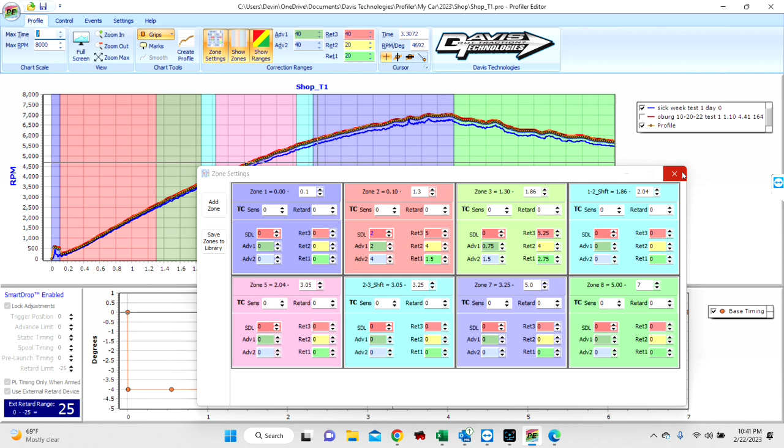And don't judge me too hard here, because we were on a tiny little tire, right? And the numbers he's talking about are legit pro mod numbers. So being on a little 235 radial, we can't accelerate nearly as fast as you can on a big tire when you're not really traction limited. They jump. Frankie's car will leave the line. Immediately the first data point's at 1,500. And then it lofts up if it's fast. And then it comes down about 1 second, 1.2. And right here, it's either going to shake or it's going to go. It might quiver. You get away with it. It's not going to be fast.

When we ran the 348 at Rockingham, that was actually the first pass in history we allowed it to add timing. It added timing most of the 60 foot, up to 2 degrees. The video I posted of Paul running around literally in tears, he told me it'd run a 52. If everything aligns, 51 certainly possible. If everything is perfect, we might get a 50 flat. And it went a 48, and he just could not believe it. It was the first pass we ever allowed it to add timing. And it started to quiver, added timing, and didn't shake, didn't quiver anymore.

And the result we never repeated, and it was killer air, killer conditions, tailwind, killer track. Everything had exactly the right tenth of a PSI pressure by coincidence. It was all lined up. I don't think anybody's ever questioned the number. Lots of 50s, harder. Everything went perfect, probably staged a little shallow. Just everything was lined up, but anyway.

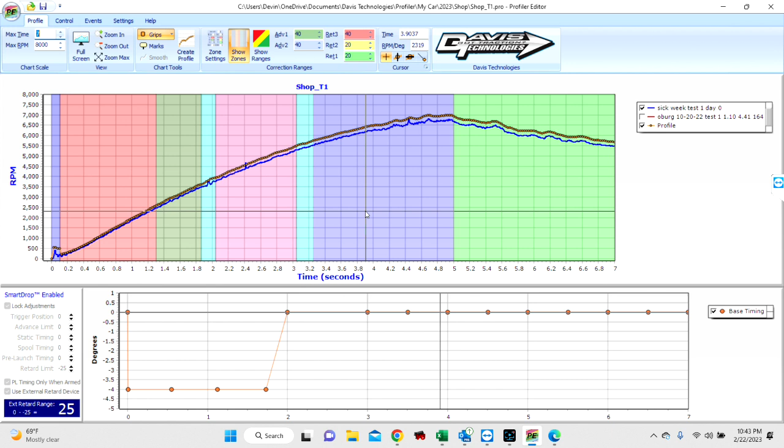Hopefully it recorded and the mics are working. Man, I really hope so as well. I'm kind of afraid to turn it off. We've been at this for a little bit over an hour. All right, buddy. If I gotta fix this, I'm gonna be bummed. So I'll see you.